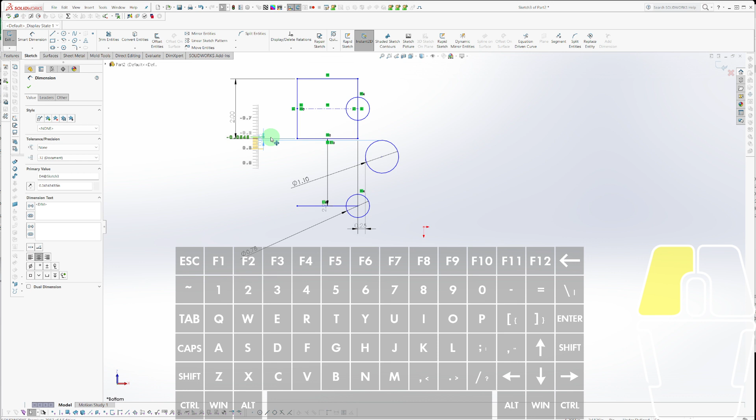And so I'm going to select both of these, and then I'm going to call them equal. So then I dimension this once, and I call it 0.78. And so now I know I need to be above this and below this with the actual bar. And the higher I put it, the more structurally stable I can make it. I did this minimum number, and that's fine. I'm just going to call that good enough.

Now keep in mind there's also a line here, and for that matter here, which is sort of irrelevant, so I'm going to leave it out. I'm going to fix this just because there's probably people having an aneurysm because I don't have fully defined dimensions. I think that can be important, and especially if you're trying to be a dictator in your engineering department, it's nice to have rules because then you can feel powerful.

But I've seen plenty of competent design engineers. Because I remember I was taught that, and then I went to a place and worked with a guy who was a much better designer than me, and he had this curve in space and it was all blue, and I was like, well, but it's not fully defined. He's like, sure it is. It's in that sketch. That's what it is.

The perils of creating tutorial videos. Evidently, I had at some point made hotkeys to start and stop recording in OBS, and so I just did a bunch of work that I didn't record, and so I just deleted it all again, and I got rid of those shortcut keys, and so here we go. So forgive me if you've already seen some of this. I'll probably edit that out.

So this started like this. Whoa. I didn't even have the extrude feature yet. Back in here. And this was not yet construction. Alright, so here's the cross-member tube. And this represents the barbell bar. And this represents the vertical leg of the power rack.

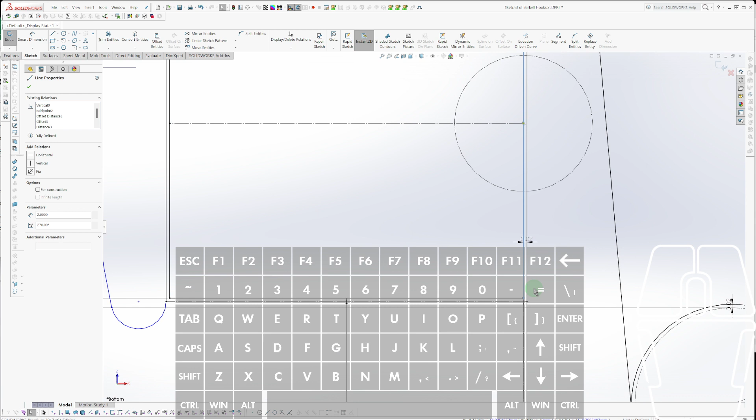And let's move this upwards. Can I? There we go. Now there's going to be potentially a stress riser here and here, but that's why I'm making this big radius. We'll see how that plays out when I throw some FEA at it. I need to make these construction. Select chain, construction. And I know I already did that. I already undid that and then redid it. That's fine.

There's a radius here. I'm going to put a radius in here, but it's a very small radius on the square tubing. I'll put that in as a next feature, just because it'll be simpler that way. I've heard people, again, self-appointed dictators say, you have to do the fillet not in the sketch. And I call BS on that. It's all situational. So many people are so definitive on things that are, in fact, in my opinion, situational. And I've been doing this a long time.

Let's undo that. So I decided that I want this. So this hook is going to want to flex, right? And so that's why it's sort of exaggerated like this. I want it thicker. The further it goes up the hook, the thicker it needs to be, and the further to the tip of the hook, the thinner it needs to be. So how can I accomplish that? And I already know the answer, but I'm just saying it for your sake.

So I'm going to create a line here to here. Then I'm going to make it coincident with this. And then I'm going to create a line from this midpoint just to an arbitrarily reliable point. Let's say to here, and then coincident again with the center. Did I just accidentally call it a midpoint? No, good.

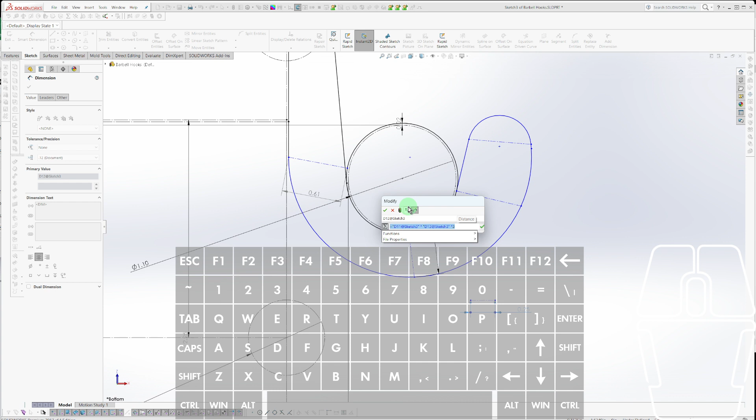And then this is going to be also a formula. And I'm going to paste that, but then I'm going to call this times 0.2. I'm sorry, times 2. Ah, that got ugly quick. Got ugly quick. And you know what I'm going to do? I'm just going to delete that. And I'm going to trim this, and this, and this.

And I want to make this tangent. Problem solved. Let's put this line here. So evidently, I didn't want that straight line in there. It was just going to cause me a little bit of hassle. And I see that I don't have an angle dimension here yet. Kind of thinking I already did, but again, I did that work that I didn't save. I'm sorry, not that I didn't save it. I deleted it.

Why is this? Okay, well this doesn't. That one's not happy. I'm not sure what the deal is. That's fine. So now the reason I did this is, in theory, now if I adjust this scale factor, say 0.23, that will adjust the proportionality of this line to this line to this line, right? So that's interesting there. Anyway, we now have mostly good geometry.

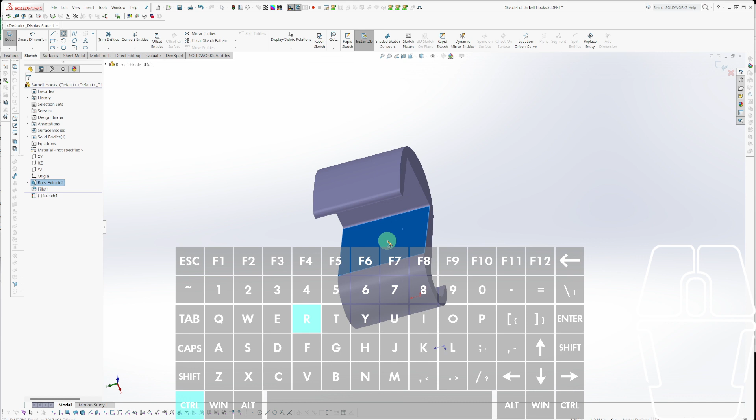Alrighty. And so I made this 3 inches, but the tube is 2 inches, and so I am going to just create a sketch here and create a rectangle, and it's going to be 2 inches from here, and it's going to be in line with this. Am I thinking about that correctly? I'm just going to do it, and then when it's wrong, I'll change it. I also need to go this direction slightly. I can drag this down to almost nothing, just to get rid of that radius also, right?

So now, yeah, so I totally thought about that backwards, and so I'm still going to reuse the sketch. I'm going to delete. No, you know what? I don't even need to delete that. I can do this, and then I am going to rebuild, and I just need to go the other direction. So flip that direction, and then I'm good. Except for

oh, I don't want the second direction. Is that what the deal is? It seems like that's going to miss something. Something about the radius. What happens to the radius if I do that? Yeah, so I took away the radius by doing that. I don't want to take away the radius by doing that. Okay, alright, I'm just going to delete that. Oh, I can't do that.

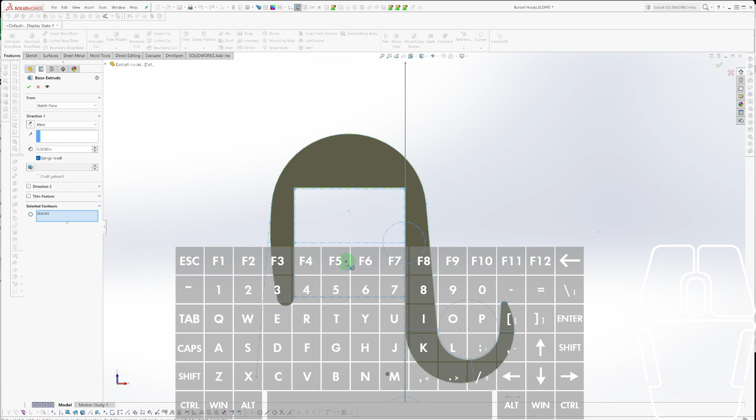So as you can see here, if it's not obvious, I'm just going to show. So let's put a sketch here, and no, I'm just going to reuse this sketch. I think I should be able to select. I need to show the sketch first, though. Show the sketch, N for normal to the selection, and I'm going to reuse the sketch. I'm going to say X for extrude. And I'm going to say select contours. And select these. It doesn't want me to select that contour.

So I guess I'm just going to, in fact, create a new sketch here. And create a new rectangle and use these as a reference. And direction 2, up to here. And don't merge. And then let's say like this. And not in the midpoint. What are the chances of getting that? And like this, and do this, and then call these equal, so it's a square.

And then, so let's say that, and control that, and collinear. And now I have my vertical cross member just for reference. And then I can also do this just to represent the barbell. I'm just going to project this geometry. Don't merge. Direction 2. Done. Okay, so now one more. I'm just going to change some color here to make this easier to see.

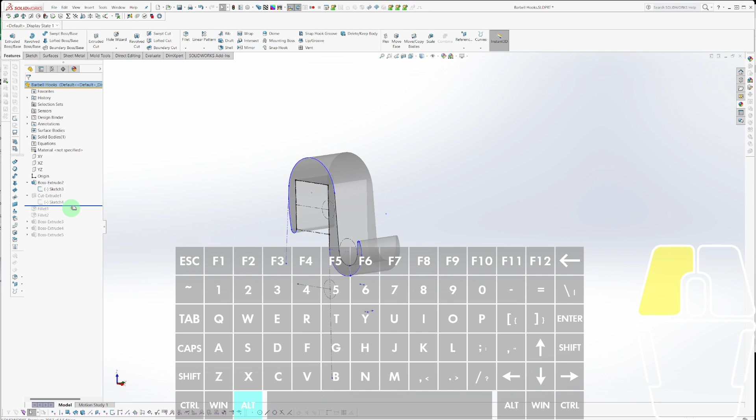Which way is it? I was afraid of something like that. So let's see. Let's back up to here. And okay, I'm just going to do this. I'm going to call it 2. And so the sort of error is in how I defined this sketch, because I defined it right to that edge. Wait a minute, what is going on here?

Yeah, so this is my overlap. So let's call it 1 inch. So now it's halfway. And then I'm going to roll to end. And so this is probably fine. It's probably still overkill. Actually, though, you know what? I really want it to lock past the other side. I'm going to undo a couple times here. Get back to where I was. Now I'm back to where I was.

And I'm going to move face on this. Let's call it 0.05 just for good enough. And then I'm going to create a sketch on there and project that geometry. And just a little bit of an overhang. So it will catch itself on the other side of the... Yeah, that's what I want. So it'll catch itself on the other side. And let's make this tangent.

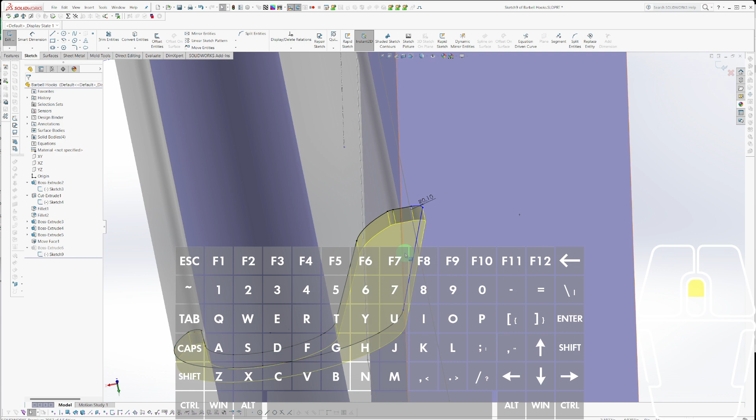Because I want to put a little bit of a taper to make the overhang more reliable. So I'm going to extrude this another, say, 0.125, eighth of an inch. Merge only with this. And I'm going to taper this. I kind of don't like that. I'm going to adjust this to, yeah, okay.

Let's do that. I'm going to get rid of it in a second, but just so I can extend to there, trim that, and let's just make a line tangent to that. And then trim this, interesting. I'm going to trim that. Trim both of those. And I'm going to do a tangent arc. Like so. Well, first I'll trim this. Did I miss the T? T for trim. And then I'll select these, make them tangent. Hope I'm still recording. Looks like I am.

And so I don't need this to overlap a whole lot. I just want it to overlap a little bit to act as a catch so the hook doesn't slide inboard. Does that make sense? And R for rebuild gets me out of there. But I want to taper that. I got rid of my top flat surface there. So I'll just go to, say, here. And then I'm going to go normal. And it's a bigger gap visually, but whatever it looks like, it's only 50 thousandths of an inch.

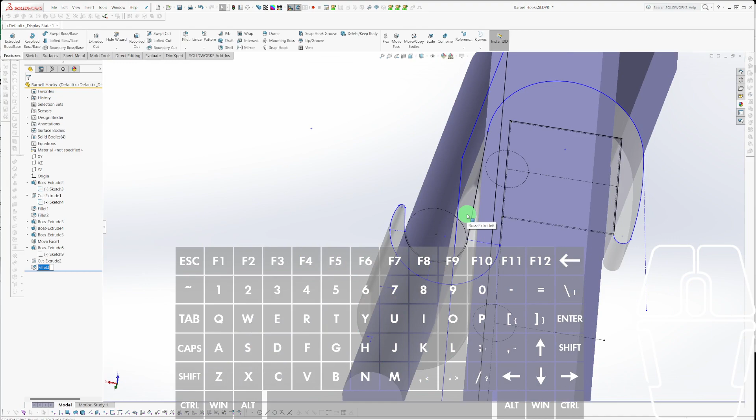Extrude cut. And now I have a sharp edge here, so let's throw a little radius on this edge. Why can I not select that edge? Okay, now I can. Not sure why. Fillet. And before I do that, let's extrude cut in both directions. There we go. Now fillet. Oh, actually, sure. That's fine. I was going to do that anyway. So this being transparent, it's tricky to see. So now you can see what's going on here.

I want to put another radius. I'm going to right click and isolate this. And I'm going to remove this. Actually, you know what? I'm going to do another display state so I can go back to transparent if I want. And in this state, if I delete that and then I go back to here. Okay, yeah, that's what I want to do. What? Somehow it got me out of isolate. Getting rid of that. I do want to isolate this again.

You know what I could do instead of isolate is just do a delete/keep bodies, keep this, enter, and then I can just suppress that, unsuppress it as I wish. Hide my sketches, which is the numpad asterisk on my shortcuts. And is this going to do anything? This nub? I think I want that extrude to go a little taller so that the nub protrudes more.

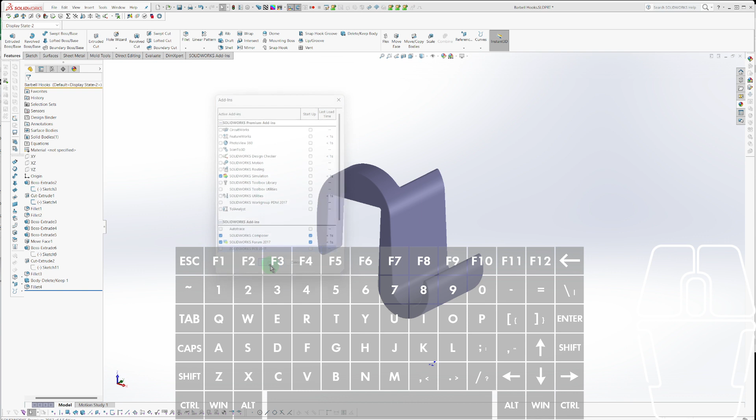So I am going to add in my simulation. So now I can do structural analysis on this. But being plastic, it's not really going to be reliable. But that doesn't matter. I am going to ask Google off screen here the properties of. Why can't I? Okay, fine, be like that. I'll just move to the other screen. Let's ask Google the. I guess I'll just go to MatWeb. MatWeb.com. Polycarbonate.

And it's obviously going to be at least somewhat degraded, being that it's 3D printed. Although, I don't know why I didn't like that. I'll just actually go to matweb.com. And I'll bring this over here for you guys. Whoa. Totally uncool.

Okay, I am recording again. All right, so here we have matweb.com on screen. Great resource. And let's say polycarbonate, just to get a rough idea of the mechanical properties. Overview of polycarbonate ABS. No. Polycarbonate. I mean, let's just say extruded, just to look at something, and I'm going to degrade it so many different ways because it's not going to be accurate, but at least it'll show me where my stress risers are. That's really all I want.

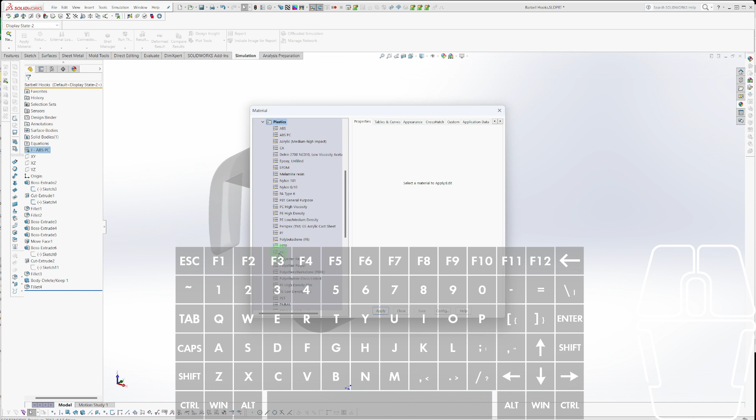Let's see. Plastics. ABS PC. See all these letter combinations. I don't see just a PC. But anyway, the MatWeb info is not ABS PC here that I selected. It's just PC. And I've derated from there significantly. And so we'll call this good enough.

All right, so let's go to simulation, study. I don't need to name it. We'll just call it static 1. And my material, because I pre-selected my material, it's already established. Okay, I'm going to go back into my model.

So first I need to define my fixtures, meaning what's holding this in position. And then I need to define my external loads, which is sort of pushed down on here. And then I need to build a mesh and then run the simulation. So first things first, for my fixtures, I basically want to add a sliding fixture here, but it's not across this whole thing because it's only from here to the left. So I'm going to do a split face on that.

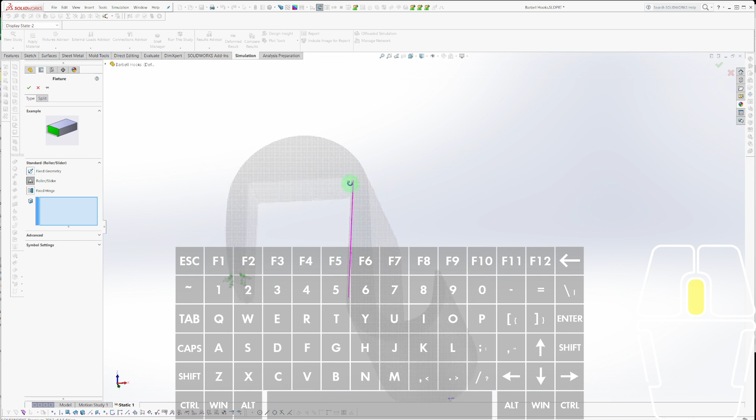I'm going to call that fixed, and then I'm going to add another fixture for roller slider, and that is going to be this guy. Right? And then I'm going to do another roller slider for this guy. Remember I did that split face for this. And it's really going to try to slide off. And so I'm going to make another roller slider just for that point right there. I'm not sure how that's going to work out. Again, this is not for something professional. It's just, in my experience, how I can get good enough results to get a rough order of magnitude prediction of where the stress risers will be.

Can I do it to just a point? I can't do a slider to just a point. So, all right, let's call it this line then. I can't do it for just a line? Man. I guess I need to do another split face. Go back into the model. Sketch here. Line here. Call it horizontal. Oops, in this view that is vertical, even though it's not really.

I'm going to do a dimension from here to here. Why did that not take? Dimension to here. Okay, that was weird. Say 30 thousandths just for something. And then a split face, split line, this face. What? I don't know why all that's highlighted, but anyway, I only selected the one face. Oh, what?

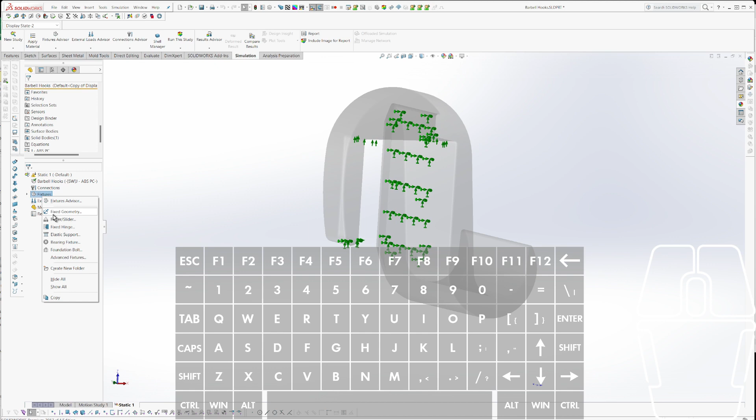Back into my analysis simulation and add another sliding fixture. No, that's fixed. Roller slider. And like I said, there may be a better way to do this. I'm not a total FEA guru. I just know enough to get what I want done, and I'm on the wrong face. Just enough to get close enough.

And you might say, oh, that's not the right way to do it. I'll tell you one thing. I've designed spacecraft structural components using methods like this, and then independently verified from an independent lab who did fatigue and modal analysis on entire assemblies and all the parts. And my assumptions work for the most part.

So feel free to roast me. I've had my methods verified by legit aerospace independent structural lab analysis to evaluate and honed these techniques to successfully pass very consistently. So there. Nah. Okay. I'm mature, I know.

Alright, so I'm going to save my work because it usually crashes right before you save your work. I was going to put some kind of taper on this, but that was before I was going to back it up by this vertical tube leg. So this thing is going to be so overkill anyway. But it'll be interesting to see how it flexes. Alright, so now I need to put a load on it.

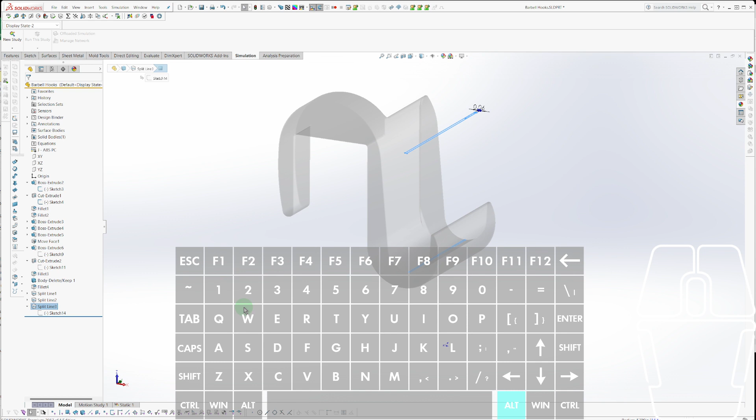Alright, this is a little off center, so let's adjust this sketch. I'm going to go normal to it, and create a line from the midpoint of this to the midpoint of this, and then make it vertical. And then I'm going to put a dimension here, just to call this 0.06, just to give it a number. So now it's much more representative. As long as this doesn't deflect, this is fairly representative of what's going to happen there. I'm going to apply my load to that sort of fat line. Again, in my experience, sufficiently.

I heard an interesting quote, and there's always a know-it-all that will tell you that you're wrong. And I know I'm wrong a lot. But a great quote, I quoted it somewhere else, and somebody who's a legit smart person berated me one time for saying that doesn't make sense. All models are wrong. Some models are useful, and that might be a paraphrase. I don't remember who said it. Forgive me, Mr. Genius Guy. He might have been like a sociologist or something. I could Google it.

So all models are wrong, but some are useful. Works for me, and has worked for me professionally, in as much as spacecraft component structural design. Thank you very much.

So the mesh will take care of itself, and I'm just going to right click and say run and see what happens. No, I didn't put a load on it yet. Yeah, exactly, no loads. All right, external loads, add a force to this fat line, and I am going to go with English. I should give it a direction, but that's close enough. So I'm going to call it good.

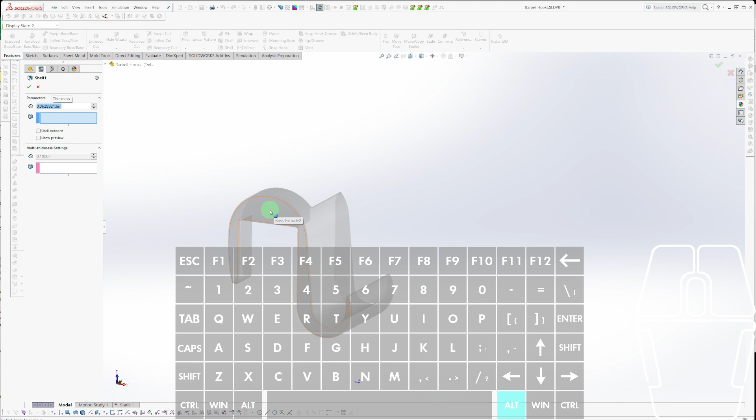Now I guess my top and bottom layers are going to be artificially... I probably don't want that thick of top and bottom layers, but maybe actually I do. I do, because the top and bottom layers are really the ones that are taking all the load. So I do want a lot of top and bottom layers. So I'll have to tune my top and bottom layers to match whatever thickness I come up with. And so let's do that.

Thickness value greater, yeah, okay, whatever. I didn't like that. What can I do to make it like that? I guess I need to make this radius bigger. Where is that radius? Why are these things not highlighting when I'm selecting them? There it goes. Okay, that was weird. Oops, that was the one. And okay, so I don't want to go too big on that radius, but this one I can go larger just fine.

And you know what? Let's roll to the end. Save my work because I'm about to break it, in case the software crashes. And so that was this one. No, it was this one. This fillet. And I'm going to instant 3D it. Wrong direction. There we go. And that fixed my shell issue. Great. I'm surprised this one's not a problem, but I guess it's not. And so I'm going to save my work again, go back into here, and rerun the simulation with this piece being hollow.

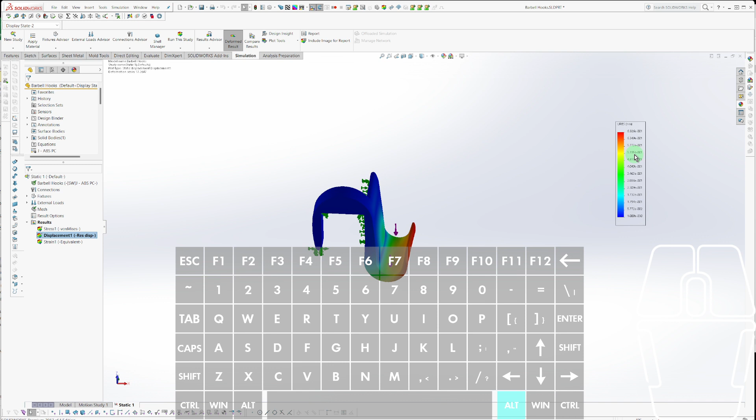So what's my actual displacement? The worst displacement, and now this is in metric, but fair enough, is 6 to the minus 1, so 6.9, so 0.7 millimeters. So that's like 30 thousandths of an inch deflection predicted at, oh, and that's interesting, that's out here. I was sort of expecting it to be like around here. Just a little more than I was hoping for, but I think it's probably fine. I have to remember to do the proper amount of shells to come up with that 1.6 millimeters.

And interestingly, okay, so I knew it was going to deflect from this direction. Can I hit N for normal here? Yes. So I knew that this was going to twist a little bit. I totally expected that, and I kind of thought that here would be maybe not the maximum deflection, but where most of the stress is. Is that the case? I mean, I say that. That's not even really what I meant. But I am saying that this thing is not going to break as it is. So the nice thing about this optimization process... Now let me think about how I've constrained it, though, before I...

As Harvey Keitel says in Pulp Fiction, and I won't quote him, but let's not count our chickens before they hatch, gentlemen. How's that?

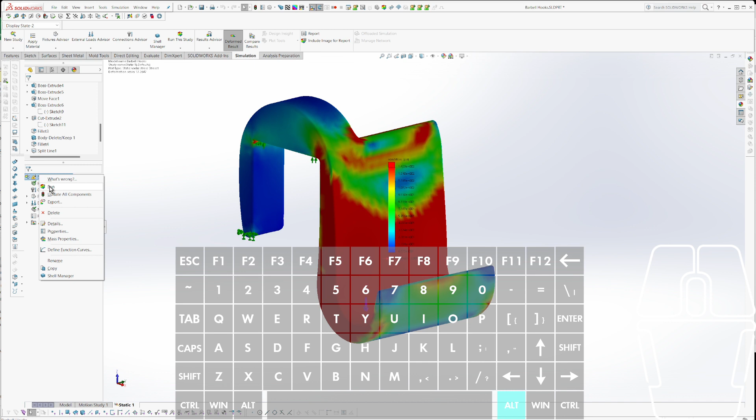Alright, let's try running it again. So now I have stress risers around this. But I'm going to say that also corroborates that it's probably okay. And I'm not going to try to justify that. Just going to tell myself that, and say, okay, it's my barbell, it's going to land on my head. I'm putting myself at risk. Good enough. I don't need to go to the independent aerospace structural research company to verify that my barbell is not going to land on my head.

So, now, I'm still the same. Okay, somehow my max stress came down. Isn't that special? I made it sliding, and I made it more realistic, and my max stress actually came down. I'm tempted to look back and see where these stresses decreased. But it's irrelevant. How about my deflections? My displacement has increased up to 1.5 millimeters. And it's much more twisting. Remember I was saying how I expected it to be twisting.

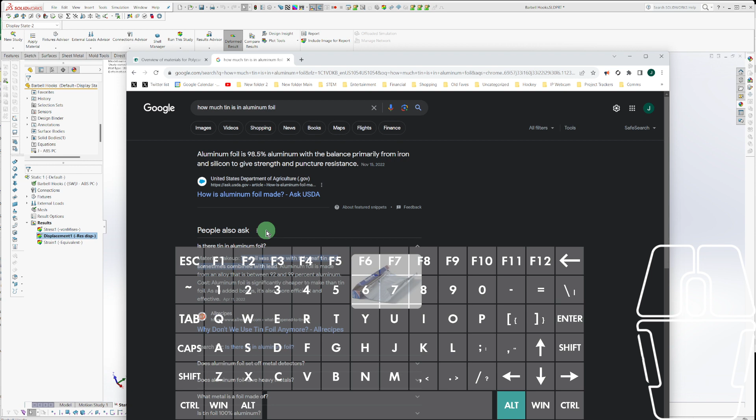They're not telling me. Alright, I just need to go back to MatWeb here and say aluminum foil, and I should be able to get the chemical composition. Aluminum foil coating, aluminum foil tape. It doesn't say adhesive backed, and it doesn't give me the chemical composition. I'm leaning towards there's actually no tin in aluminum foil. That's my assumption, and I'm sticking to it.

Okay, meanwhile, back at the ranch, my deflection has gone up. My stresses have gone down. Let's go back to the stresses again and continue to revisit my fixtures. I'm going to change this because the way it's really going to work is it's going to be all on this forward edge. Just as it's all on this top edge on that face, it's going to be all on this forward edge. So I'm going to go back into my model,

and I'm going to select this face and create a rectangle on it. I don't need a whole rectangle, I'll just create a line. It thinks it's vertical, I can tell by this UCS icon here, and I'm going to say, again, 0.06. Enter, and then split line on that face. Why does it do that? Please select one or more faces to create edges. What? I don't know what's going on there. It's consistent though. But anyway, I got it to work.

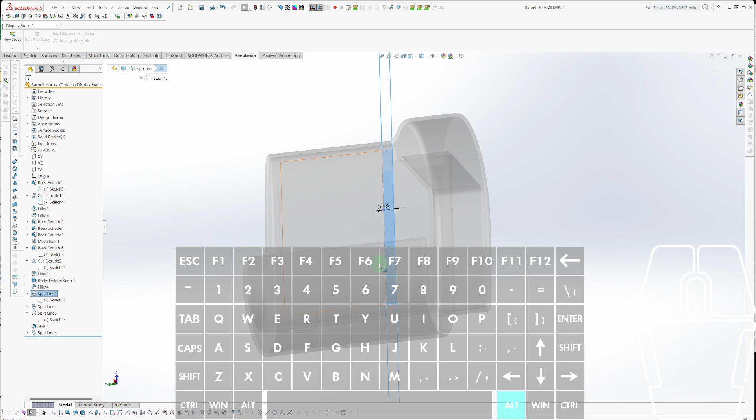Where's the split line? Is that this one? Yeah. I'm going to add another line. Let's just offset this by 0.1 in this direction. And that's just arbitrary anyway. So now I have that, and I should have broken this one also. No, it didn't figure this one was broken, so I need to edit this guy. Instead of this one, I want it to be this one.

Alright, so I think this is typically how all models are wrong, but some models are useful. You iterate, you make an almost useless model that will fool you into killing people, and then you gradually refine it until you scrutinize it enough that you're confident that it's good, perfect enough, as I like to say, and probably annoys people, and that's fine. If I'm honest, that's kind of how I roll.

All right. So, how are we doing now? Our max stress is still... Oh, you know what? I bet that max stress is down here, and that's why it keeps giving me that max stress. But these are also in the red. That's so weird. I'm going to adjust that scale because I'm not sure why these are all so uniform in stress. So I am going to edit this definition and manually define what's shown here. Minimum value, 142.

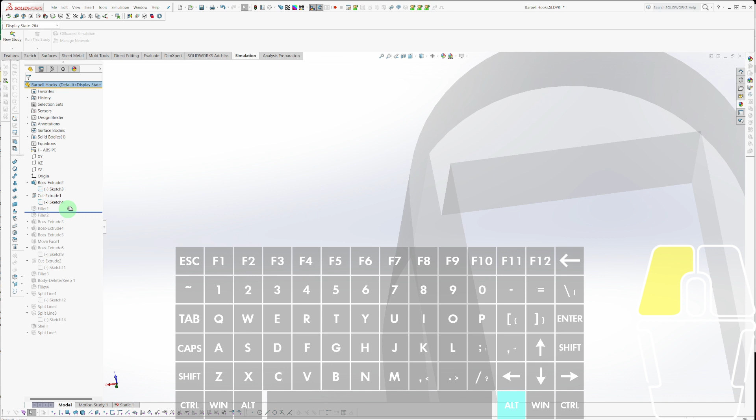So, where are my max stresses? Surprisingly not here. I don't have a radius. Yeah, I do have a radius there. Yeah, there's a radius there. I want this radius to be bigger though. I go back. Oh. Yeah. Let's do that. And then this one. Yeah. And then I'm going to make this a big fat radius. Now that's useful. That's what I'm talking about.

Nice chunky radius there. Well, I say that, but as I think about it, the barbell is going to remain horizontal. And therefore, it's not going to put a big stress on there. And that's why there wasn't a big stress on there. So I'm going to change this back to, let's say, 0.1. And if I get a stress riser there, then I'll increase it again.

But I lost the rest of my radii here. How'd that happen? This guy and this guy, and give them a 0.06. I wonder if that would mess up my shell. Messed up other things. Oh, it messed that. Yeah. Oh, so I put that in later. There we go. But what did I break? I broke this split line. Oh, I just lost my reference, that's all.

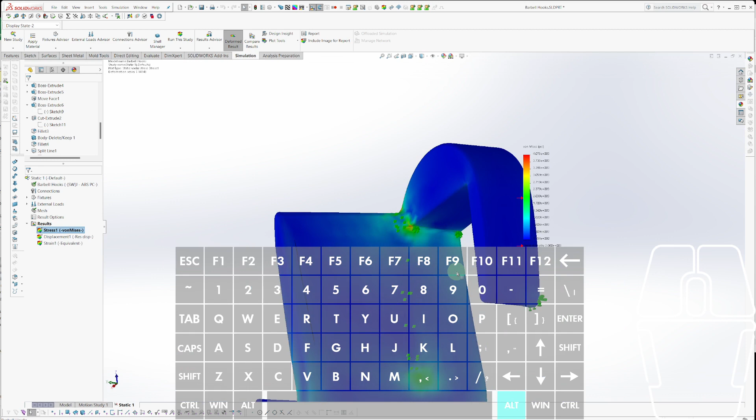Okay, so I do have a little bit of a stress riser here. I am way over the max stress. Where? Here? No. Where's my max stress? There. Not a huge surprise. And that is not big overkill in design. And so that's why I'm doing this. So that is fairly likely to fail there. Now, on the other hand, again, the barbell is pushing downward evenly across this.

A lot of times you get these very concentrated max stresses, and it's more of an artifact of how you make the sliding fixture, and it's not real. But what tells me that it is kind of real is that this yellow is also over, and a lot of this green is also over my 2-to-1 safety factored yield strength. And also, interesting here, this is also approaching my safety factor limit. These are also.

So I can make it thicker walls, or I could increase this thickness here, but that's not really my problem here. Although that's a little bit. And this doesn't need to be nearly this tall, and this doesn't need to be nearly this tall.

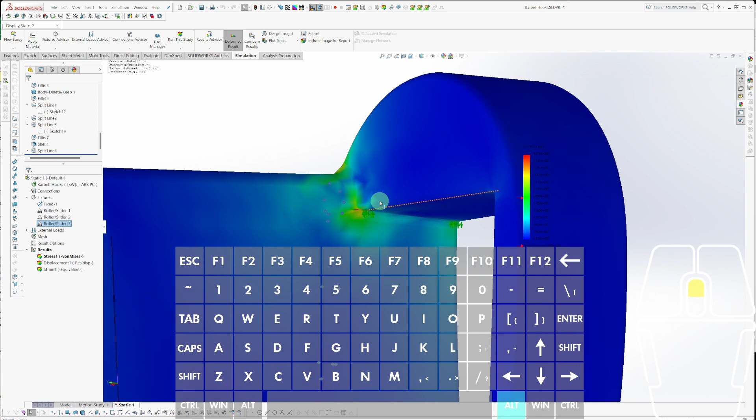Even though the bar is helping it to stay straight, really the bar is constraining it in two degrees of freedom. The bar only really leaves it the 1 degree of freedom for the tip to uncurl downward. But I'm going to call it somewhat overkill. Like I say, I want to design this for overkill. But I can eliminate a lot of this plastic. So let's save this. First, I'm going to eliminate the dark blue areas.

And did I lose my display states again? I did. I don't know why it's giving me persistent... this transparent keeps coming back. When did I make the whole part that? I don't remember doing that. Okay.

So this here was way too blue. This here was way too blue. So I can adjust this significantly. What I'm going to do here, that's not what I meant to do. R for rebuild is not what I meant to do. I meant to do T for trim. I'm just going to trim this back to like here. And I don't want this to any longer be tangent to that. I'm going to save my work. S for save.

And this angle. So this should get significantly stronger. And it turns out I need something more like this. And make this tangent to this. And that's already, whoa. Let's just give this an angular dimension of, say, I don't know, 10 degrees.

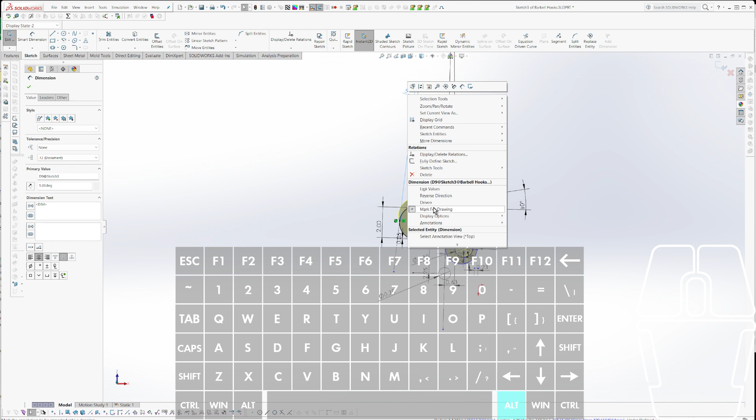And what is driving this? Is it this angular dimension? Let's make this driven. How many times did I say that backwards? Okay, that's still not constraining it. Sometimes a curve will keep a constraint; you delete a constraint and it still acts as if you didn't delete it. So I'm going to delete that. Yes. I'm going to bring this up here.

And I think I can get away with just making this a line. It probably doesn't even have to go that far. It'll probably just go down halfway, or even just down to here. But I don't want it to accidentally jump off, so I'm just going to do overkill as usual. No, I meant to drag that. And then I'll make these tangent. And, whoa, those aren't tangent. Tangent.

I don't think that needs to be much. I'm just going to put a little bit of an angle on this, an angular dimension. Let's say 3 degrees. That's even overkill. Reduce that. All right, that looks good.

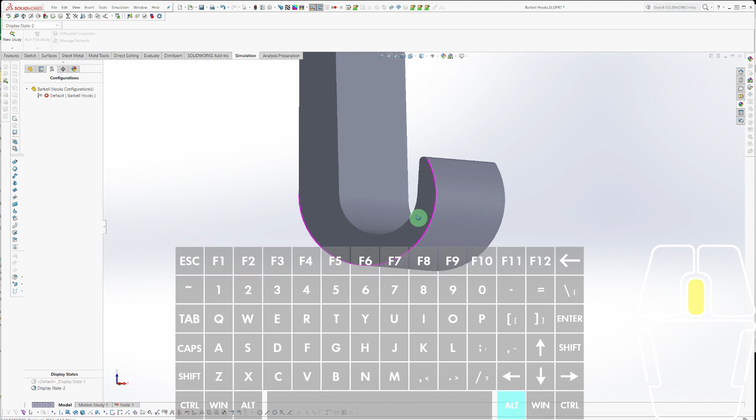All right. Now what's going on down here? Things are not fully defined, and I don't care. Let's see what happens. I broke stuff. Oh, I broke a lot. Now, I didn't save myself a backup, so I don't remember exactly what went where.

Okay, that was just recreating the... What, I deleted the vertex or something? Yeah, up to vertex. Can't find the vertex, so I'll just redefine the vertex then. So that fixes that. And this again probably lost its vertex.

Oh, open contour. What? Oh, this is that curve. So I'm going to make a tangent curve here. Make that tangent. I'm going to call this very small radius 0.02. And then this guy can do this. And so I'm going to dimension that to that and call it, I don't know, 0.31, 5/16. Rebuild. Okay.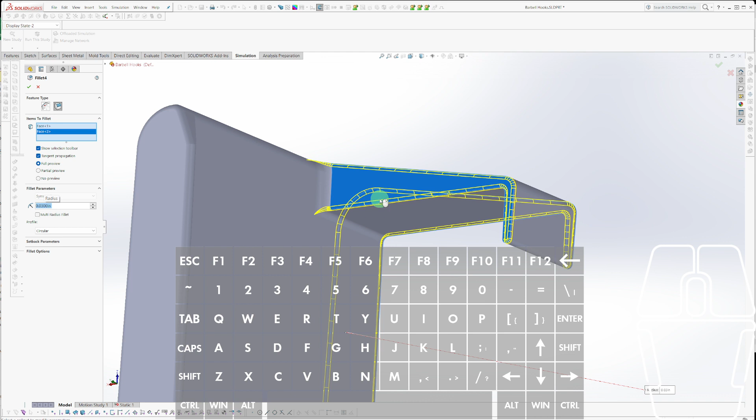And that looks so flimsy now that I look at it like this. How could that possibly be effective? Because that's just not where the stresses are. It's an interesting thing about stress analysis. Structural analysis, stress analysis, sure, I'm going to call it that. Fillet. Okay, whatever, I'll take that. Did it mess up my shell though? That's still shelled? Holy cow. Okay. Now if that twists out, that ain't going anywhere. Alright, let's run this analysis again.

This video ended up being way longer than I intended it to be, as usual.

Broke my fixtures. Aha, I broke the fixture. The true fixture. Add a definition. And this should again be fine. I expect to have some artificial artifacts. Is there such a thing as artificial artifact, or is that a redundant redundancy?

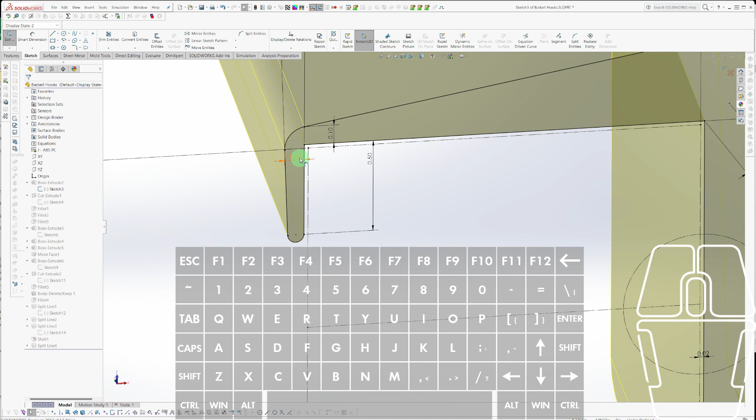That is the sketch. I am going to... maybe that'll take care of it. Or not. Let's try it. Let's see. No, invalid body still. Okay. What? That's not what I meant to do.

Alright. I'm going to do a little thing called divide and conquer here. Advanced technique. I'm going to chop this thing right off and see if that fixes it. And then I'm going to go shell. And I say okay. So that's not necessarily where the problem was. Now if I make this visible and turn my sketches on so it's really visible, and then do this, and then do this. Still. So evidently in two places I have too much. It's too minimum thickness. Let's press that.

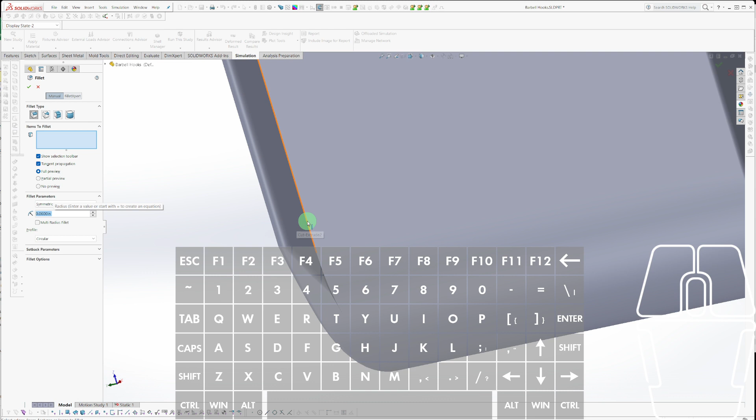Interesting that those aren't filleted. Probably not the problem, but I want them to be filleted. I think 0.03 is just too small. Could be part of my problem. Although adding these radii may actually be the problem. It could be. I don't think so. Why doesn't it want me to do that? Oh, because of the...

Okay, it does not want to fillet that. How about if I go to before this? Still maybe not. Now it's happy. Yeah, I'm going to leave that at 0.06. And then, does that break these? No. Good. And still doesn't like it, but what? Okay.

Okay, which one was it? I don't know. Why can't I see that thing? That's that guy. I'd really like this better if I could see. Okay. I have mixed feelings about this new snipper tool. Open, damn it. Oh. Why is that fighting me? Stop fighting me. That took like 47 clicks. What was that about? Okay then. Alright. That's approximately where it's oriented. So that way when I go back into here, I can make sense of it.

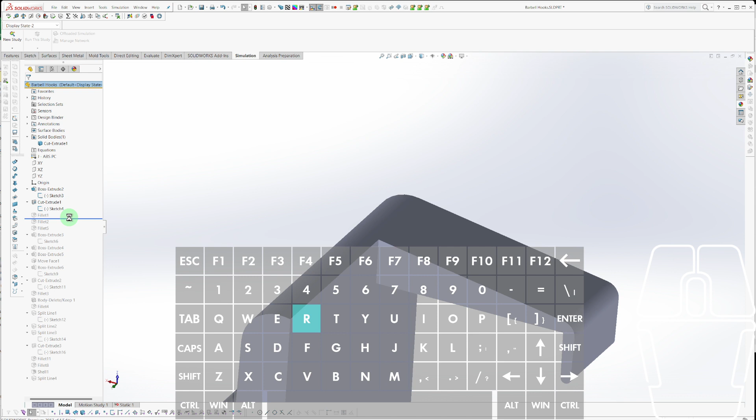Fixtures. That's that guy. That's that guy. That's confusing. Did I break my split line? No. Definition. And I'm doing this blind. Oh, I can't even. That's annoying. Alright then. Oh, that's ugly. Alright, let's regroup. That guy's right. I think. That guy should be fine. That guy should likely be fine. That should be fine.

This, 0.13. I mean, that could fix it. What? Oh, because of that huge radius there. Split the difference. So that fixed some things. If I just go back in here, can I see it? No. Well, isn't this a rabbit hole? Can I select on here yet? Anywhere? Anywhere? Bueller? No. Something's not happy.

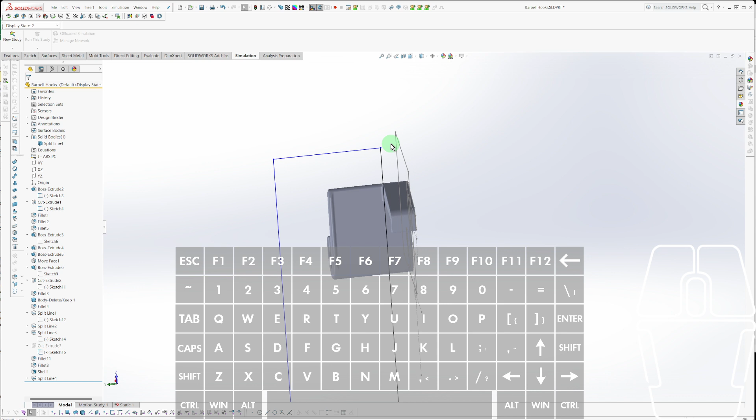I feel like I'm gonna sneeze. You know what? I don't know if this is just like a psychological placebo effect thing, but I remember way back when somebody telling me if you're gonna sneeze and you can't sneeze, and you're like, I want to sneeze, but it doesn't come out, they say, look up at the light. And I look up at the light, and then I sneeze. I don't know if it's the looking up or if it's the looking at a light. I think it's probably more like looking up, but maybe it's just more placebo. But maybe it's actually looking up.

I don't know. Now, this guy isn't helping me that this is 0.03. Can I do like 0.1? Nice. Although, I kind of don't want 0.1 there. Let's go 0.06, if it'll let me. Well, let's first see, does that fix my problem? Still doesn't fix the problem. So let's call this, no. Where are you? Where'd the dimension go? There it is. 0.07. And rebuild, and it's still invisible.

Well, I mean, how much time do I want to waste on trying to save a little bit of material? Let's just do this. See if it fixes it. Okay, did that fix it then? I still can't see it. If all the time that was the problem, well, for some reason it hid that, that would be goofy. Regardless, it's only a little bit of extra material, so I don't care.

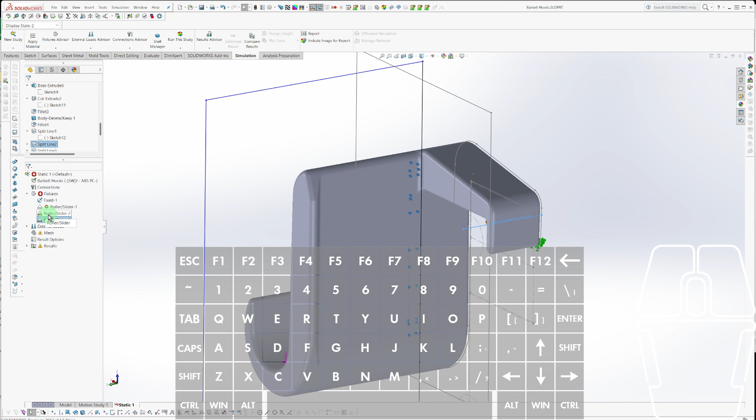And I am going to reduce it. That's not the right button. Model. Oh, no, that was right. Fix that. Fixture. Holy cow, that was a rabbit hole. I got past it though. Now back to the actual work. And we're still significantly over. No, I mean, I did also thin the walls out a little bit, so.

But let's see, so basically greening up are my problem areas. So this makes more sense though. So this and this is where I would expect to see the most stress. And here and here and here are also where I would expect to see the most stress, and here. And back here, we're really in good shape. This is just starting to get a little stressed, but again, that's because that is my true fixed fixture. The other ones are roller sliders. All right, so we are getting there. But I do need to make it stronger.

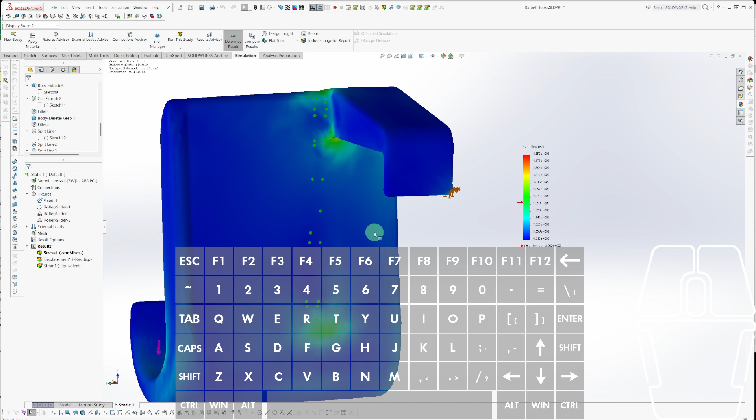But if I put a rib in here, I don't like that because it's in plane with the layers, and that is not ideal. So actually, here and here and here, that's my real concern because those are in plane with the layers. Each layer is like the capital J, and so this is just going to put in tension one of the layer lines, and that is stronger in theory. Although with polycarbonate, it has such good interlayer adhesion that it may not be a problem. But I am going to treat it as if it is.

Therefore, maybe I do just want it thicker. More shell walls. What happens with my shell minimum curvature thing if I do that? Let's see what happens. If I make my shell 0.12 rather than 0.06, the shell does not like that. Not a major surprise. And it won't even do it anyway.

Alright, what I'm going to do is get rid of these radii. Or maybe not all of them, but at least this one. And this one. And rerun it. Alright. Let's do that just for now. Let me do what I was originally going to do, which is add a... Haha, this is going to be even goofier and better, and safer, I should say.

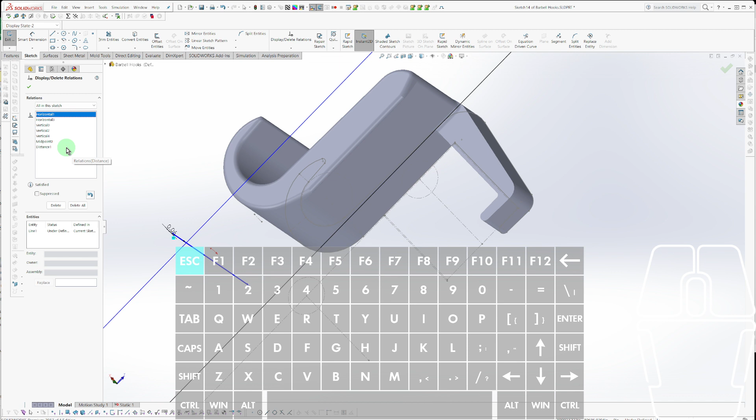Add a sketch plane. And oh, looks nice. Looks like I can unsuppress it now. Did that bring my radius back as I didn't want it to? It did, unfortunately. Wait, what? Yeah. So I need to get rid of the offending constraint. It's probably a midpoint. Could be a distance. It's not going to be the rest of them. So I should be able to now suppress that while still having this split. Nice, nice. All right.

External load, redefine. All right, now let's see what happens. Am I shelled? Yes. But did I double my shell? No. 0.12. Does that work? Please? Nice. Alright, 0.12 shell. Oh, interesting. I didn't get rid of that radius and it still worked. Good stuff. Okay. Let's run this.

I'm getting mentally fatigued and hungry. Some black coffee will take care of everything.

Alright. Where are my stress risers now? It's funny to see how much this stuff deflected, and I'm fine with that. I do that intentionally, so that way I know that this fixed fixture is not interfering with the motion of the part. A little trick I've been using for a long time. And so I just have that one tiny stress riser right there.

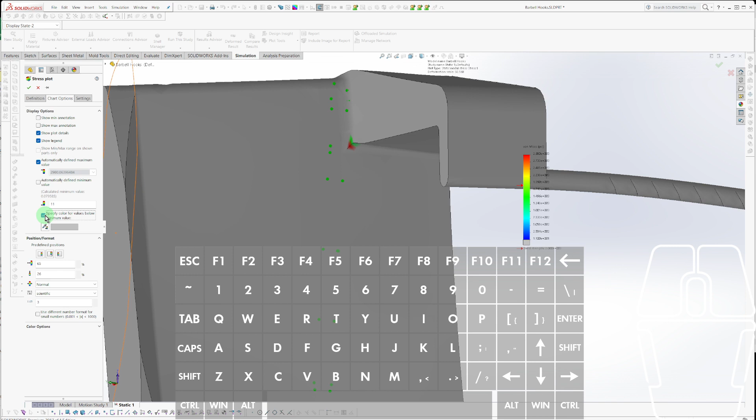So this thing is so overkill, except right here. I kind of knew that when I doubled everything, it would more than double the stiffness. But I still have to mitigate that stress right there. Actually, let's change this to 1000. Wow. Okay. So let's make anything under 1000 grayed out, and that'll be my real happy place. Alright, so much of this is just way overkill, except for right there, and right there.

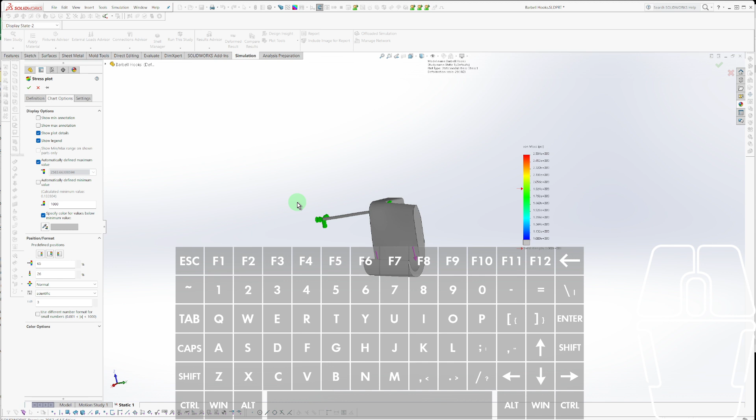I've been doing this stuff so long, I see these colors, the way they're going to distribute very roughly in my head. And then obviously there are some surprises because I'm not a total computer, but I can kind of see in my head where I can taper things down, because the stress is just going to reduce as the leverage is. That's not a good way to say it, but anyway, I can see ahead of time where I know I can taper things down.

So right from the start, before I even laid any of this out, I intended to potentially do some tapering, and I'll try to demonstrate here. Automatically define maximum. No. Anything under 1,000. And then the minimum value, 0. I might want it higher than that, but let's call it 111 for now, just to do something. And specify color for this, anything over it is black.

Okay, so you see the black there. You see not black there. As I mentioned, this is not quite up to the highest stress point. And you can see, interesting. So I can taper up top more than I can at the bottom, theoretically. Although this is such overkill down here that I can thin this out significantly down here. So let's do that and rerun it.

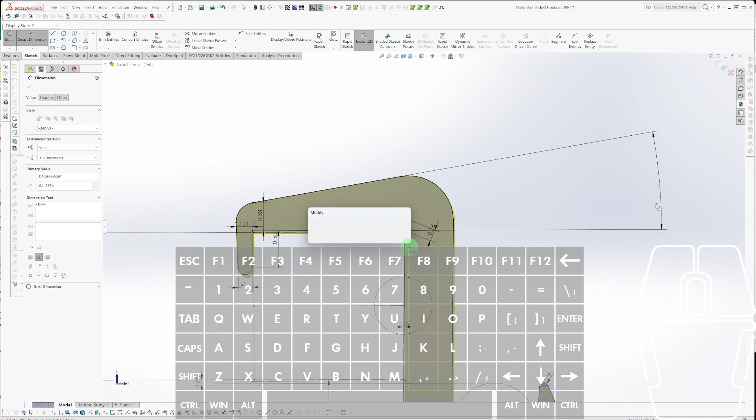Interesting. Let's get rid of this angle. And call that that. That's perfect enough. And so now, can I adjust this now? Nice. Nice. Except, you know what's not nice, is I can't get the bar in here now. See what I did there?

So if I make another circle, same size as this, I can't get it out. Alright, so let's make this construction and just leave it here as an indicator. And did I set this at an angle? Interesting. Well, isn't that special? Oh, because I eliminated that line at some point. But that's fine. It's not going to jump up more than its radius.

I could go even lower than that. Even that is going to be plenty in there. Might not be plenty strong. But alright, so now I can get this in and out. And let's see how this looks in the old FEA ski. S for save, run it. There is no load.

Fixture or contact in the following bodies. What are you talking about, Willis? It's funny how I said that entirely incorrectly.

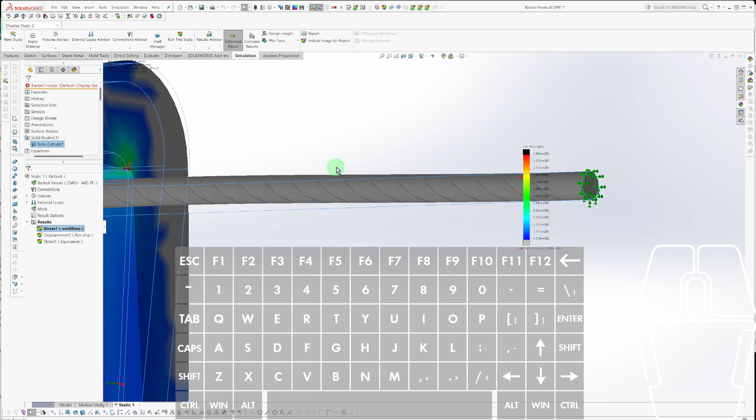So we are, I mean, we're still only at 2600 PSI, you know, 2.6 KSI at the, and that's not even real. There'll be a radius on there, like this radius here, so I'll be back down around 2200, which again has so much safety factor already built in. Look at, it's funny, these deformation lines there. In any case, here I am in the green, so I'm well under my desired safety factor there.

How much does it deflect? 1 millimeter. Okay. A little more than I'd like, but realistically, it's probably fine. I could potentially beef that up. But anyway, I lost the focus of where I was going with this. I was thinking that I could taper some of this down, like from left to right in this view. I could taper it down.

But here and here are really my key stress points. And they're uniform. So I don't necessarily want that part to be tapered. And up here to here seems to be similar, in fact. I think I could taper that down though, but like who cares? But let's try a little something. Let's go back to before the shell. Let's do this. Okay. And actually, that's overkill. Let's just do something.

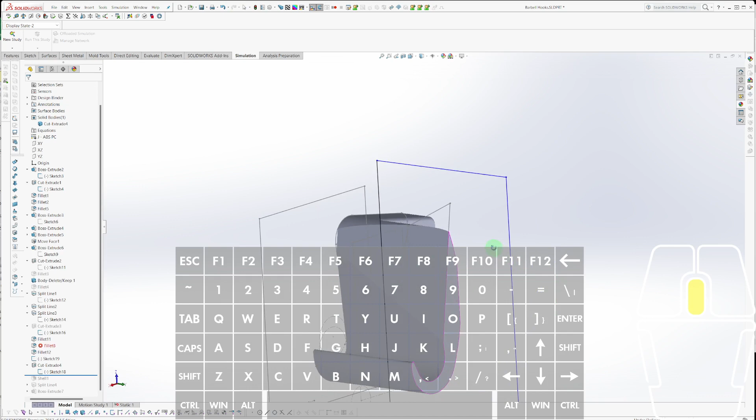And let's, I don't like that it does that. Why, oh, huh, interesting that it didn't consume that sketch or hide it. Let's do this though. Did I not? Oh, yeah, of course it did. See what I'm doing here? Oops. So, that's interesting. That's interesting. Yeah, I'll show you. I'll show you.

Now let's see what happens. Now it's just getting ugly. Now I don't even want to do that just because how ugly it is. But that's okay. I can pretty it up after. We could put lipstick on this pig.

So, as you can see, my stress risers here are still uniform. My stress risers here are still uniform. My stresses across here still plenty strong. That didn't make any sense what I just said, but it kind of did. If you can translate from my internal mental language to reality, we're really in the same place that we were. See what I'm saying there? So let's take that a little further.

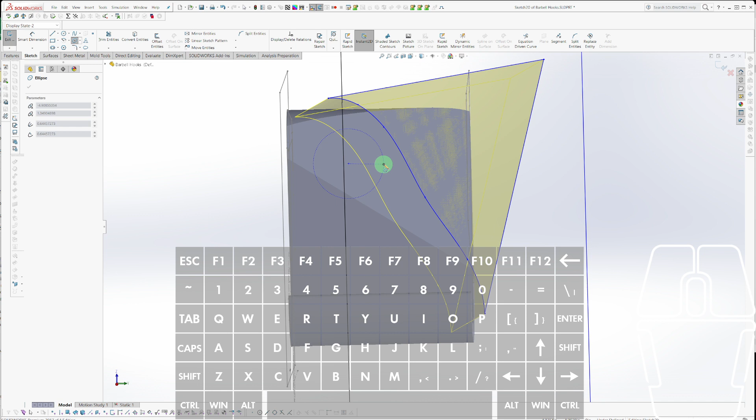To not stretch it around. Then I should be fine. Although I did save my work, so even if it blows up, not the end of the world. And I'm also going to do an ellipse, or a few ellipses. Why do you do that to me? I mean, I'm really looking for trouble now.

Alrighty. It didn't want to cooperate with me too well there, so I fixed that in place. And let's, this guy. Huh, okay. Uh-oh. Oh. Alright, I don't want it to go that far. Oh. This guy. I don't want this guy. Oh, actually, though, I can get away with something like that if I go further up.

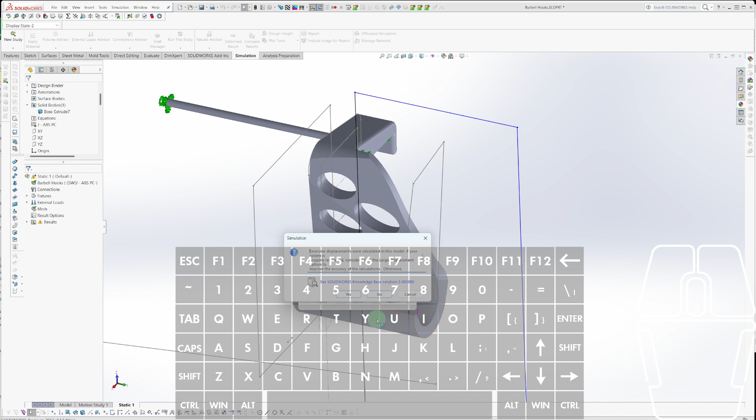Ooh, excessive displacements. I made it pretty weak. Wait a minute. No. Yeah, that got ugly there. So did it shell though? Yeah. Oh, okay. So it didn't shell. Excuse me. Up there. Interesting.

So let's adjust these shapes a little bit. Let's just scale this guy down. Down 33%. And let's run it again. Oh, interesting that I did away with most of this tab, but it's still there, so it should still be effective.

And why is the split line not happy? Oh, okay. Let's get this down a little bit so that split line isn't interfered with. I mean, I could have just fixed that a little bit. I got room for another ellipse up there. Yeah, I don't want to interfere with that.

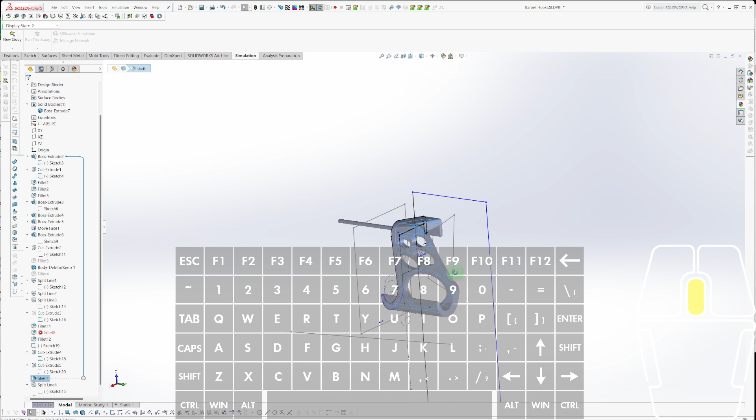So, but is that shelled up there now? Yep, good. Because the only reason I have it shelled is so it's an accurate structural analysis. If that were solid, then those stress risers would be artificially stronger than in reality. Alright, let's see.

And so again, my max stress is 2,500. Oh, has it moved out of town? Where is it now? Well, anyway, down there we have plenty of strength here. Plenty of strength here. Interesting. We're a little bit on the stress risery side on the ends of this ellipse here. That's interesting.

I could be looking for trouble with this ellipse, just because this is going to be in tension, and I'm printing it. Okay, right here won't be, but right here, well, the layers will be in shear. The layers won't be in tension in the direction of the layers, but they'll be in shear. Probably fine. Like this side I'm not worried about at all. This side, I'm going to reduce this ellipse a little bit.

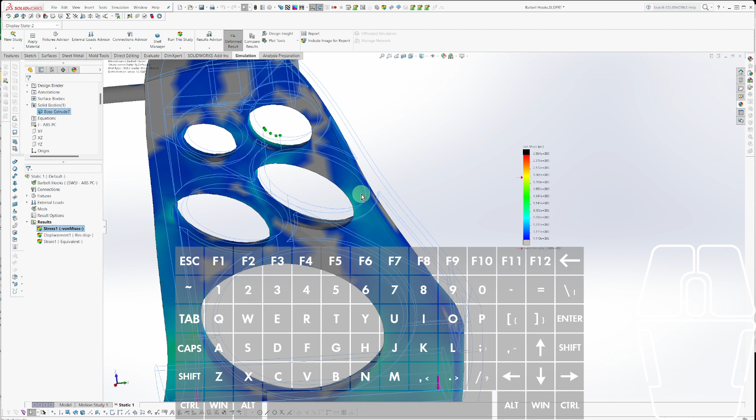All right, so my peak stresses are still similar. These stresses over here are a little higher on this side, but again, I'm more okay with that because I don't have anything in shear. Like on this side, I've mostly eliminated this portion in shear. Here is also going to be in shear a bit, but my stresses, we're into the blue here, approaching gray. So those stresses are very low anyway.

Most of the stress is here, here, here, here, and here, and even those numbers are not even into the light blue. So, you know, 600 psi, psh, big whoop. And up here, we are up over 2,000. Do I want to improve that somehow? I mean, here I'm still under 2,000.

What about my deflection? Displacements. 1.5 millimeters on this one. So now it is starting to twist a little bit. But again, the barbell will help fight against that, which in turn will help reduce the stresses near this. So this side is even less stressed. And what's this going on here? This looks plenty strong.

And the displacements up here in the blue-gray region. So we're talking, like steel gray type of, 1/4 of a millimeter, 0.010 of an inch deflection. That's not going to fall off. Question is, do I trust these structurally here and here? That's really the only place I'm concerned with. And also potentially creep over time, like slowly creeping.

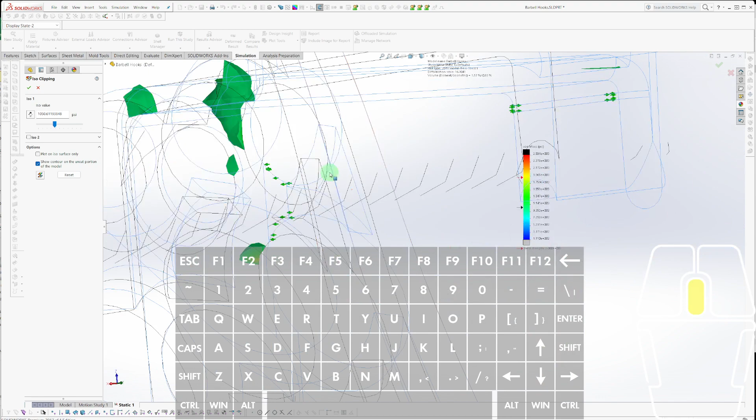I mean, from there to basically to yellow. From green to yellow is all approaching being stressed. And does it go all the way into the interior? I guess it does. But wait a minute, what am I looking at? I'm confused. Okay, I see. So this side doesn't make it all the way through to the interior. This side does. But, again, I don't yet have radii on there.

So when I add back in radii, let's cancel that.

I'm hungry. I need to eat. Let's call this almost done.

Okay. Need radii before the shell. Alright, focus. Radii before the shell. Especially... Okay, that one's already there. Well, that's interesting then. What? Let's look inside here. Oh, it's before the shell. Stupid. Okay, radii before the shell.

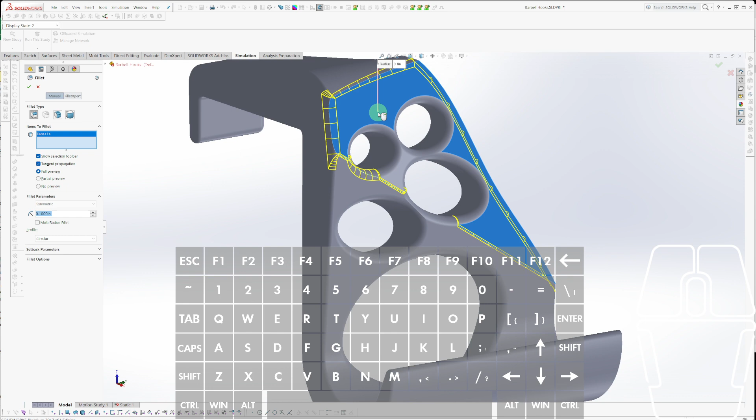And I mean, I can make this even bigger. Wonder why it didn't like this one. And now it likes it. Okay, then. That's pretty cool looking. Oh, now it does like that. Sweet. Looking good. And then over here. Oh, and here. No, didn't like that. Does not like that.

Well, I don't want this to be sharp. There we go. How about this guy? How about this guy? Nice. Ooh, we got this guy left over. Let's just be lazy and just do another one. I think that's all my sharps. Now, what's the chances this is going to mesh? Zero to none, right? It didn't even try to survive that.

Okay, I got a little bit carried away there. What did I do? I wanted to add that one. That's all I really wanted to add. So let's do this. Roll back to before here and run it again. What? What did I do? Thickness, blah, blah, blah, yeah. Okay, that took.

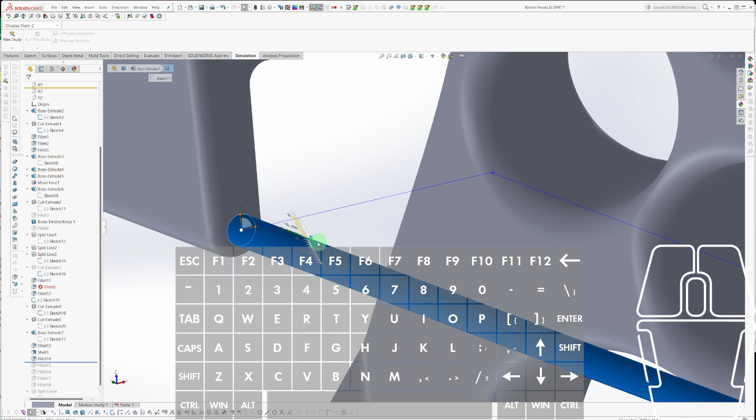Maybe? Which one is that now? I forget which one that was. Okay, that's that upper one. Oh, did I break my split? How did I do that? Where's my... Oh, duh. There's that. Alright, we could be cooking with gas here.

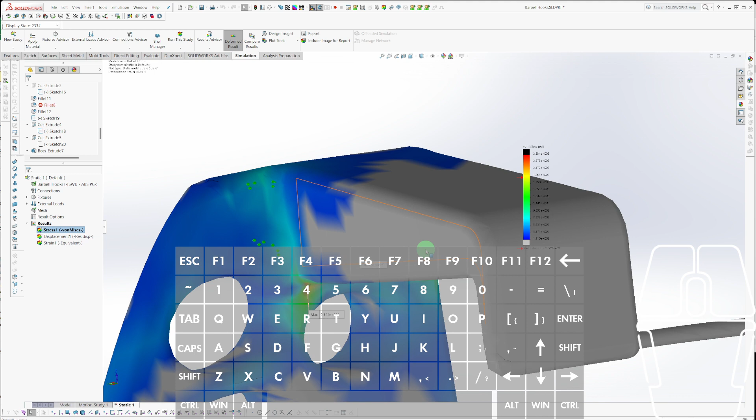The trickiest part would be this here. And maybe I'll just increase the radius inside there. How can I do that? So let's go back here. Save a copy. Okay, let's section this bad boy. Does that work? No. There we go. There we go. That's what we want.

And I don't like this coloring here. Is that because of my lighting? Or no, it can't be because it's so shadowy. Off in SolidWorks. Okay, let's turn it off. Edit. Why do I not see edges though? Well, duh. Okay. And why is that not radiused inside? I was expecting that to be radiused insidewards. But I guess because of the minimum curvature thing I do.

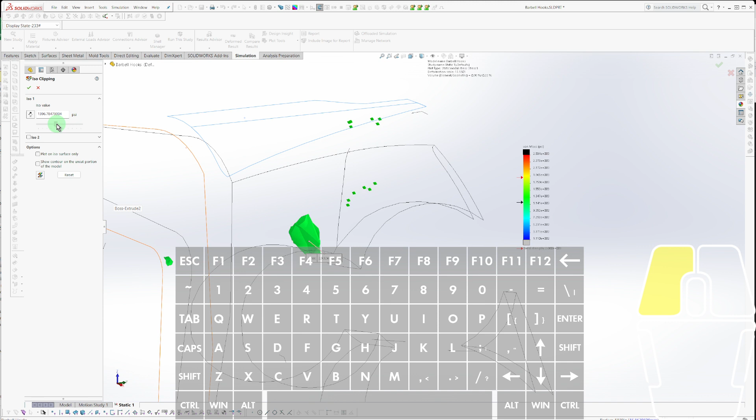I didn't want to keep the Iso Clipping, so let's turn that off. Show contour on the uncut portion. I don't know what that means. Oh. Interesting. Okay. Any case, oh, cool. I just disable it that way. That's what I want to do. Okay. So let's just revisit this.

So my stress is here. Pretty damn low. You know, 1-ish. One KSI-ish there. And that's only right there. And here, even less. Here, even less. All in these, looking good. Over here, a little stressed, but well under my safety factors. This guy, just stubborn, doesn't want to.

But you can see that's just that one node peaking. And again, it's artificial because it's showing on a square edge, which it's not sitting on a square edge. It's sitting on a curved, radiused edge. And these red spots were much more pronounced before. Now they're just very faint red, and now it's back into orange and yellow. So that has come down quite a bit. And this all looks pretty damn good.

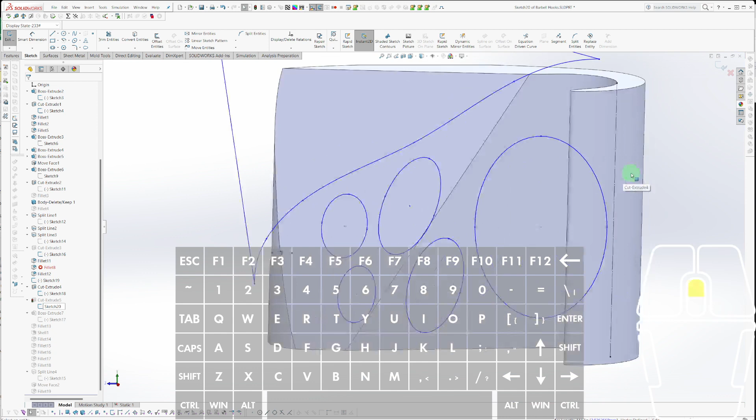I'm going to edit the sketch, and I'm probably going to blow up my SolidWorks by doing it. Although if I just move it... No, I can't do that. If I just redraw it, that's what I'm going to do. I'm going to redraw it. Let's do this. Keep out zone. Do I have keep out zone here? Okay.

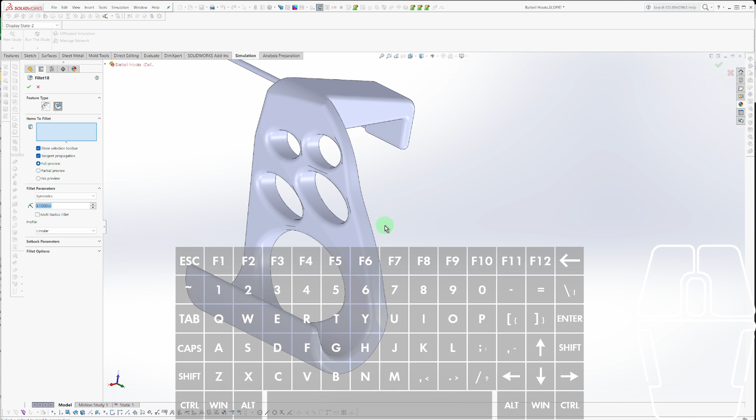Whoa. Aha. All right, and can I add this to this? Nice. Looking good. All right, let's do this one now. Where? So it's totally missing. I'm going to reduce this one just a little. Yeah, just a little more.

Huh. Never mind. I like it. Ooh, I did like it. I don't like this. Although it's probably okay. Yeah. Alright, I guess I'm going to make this guy a little smaller. That'll do. I'll bring it down a little bit, actually.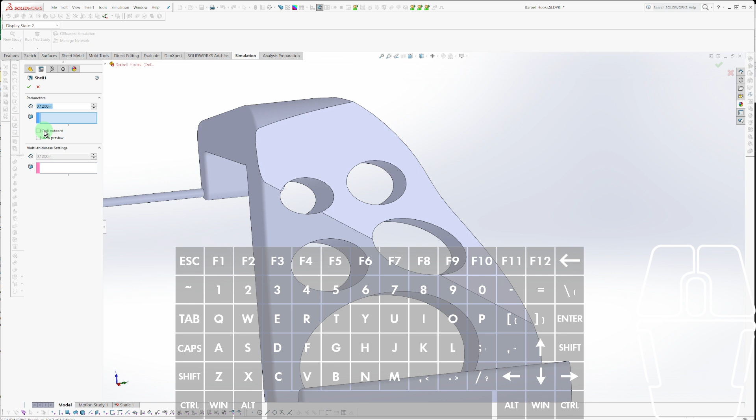Nope. Alright. That's looking pretty good, if I do say so myself. It looks so much different than I envisioned in my head when I came up with the design. Oh no, I broke the shell. I broke the shell. How did I break the shell? Must have been in moving this stuff around. What if I... Will it tell me where it broke? Everywhere. It broke everywhere.

I mean, maybe I go down like 1%, 8%, 0.11. Oh, 0.1. Haha! 0.1 worked. Alright, so I just made this thing deadly. Alright, I guess I'll run the FEA one more time, since I just made it whippier. I suspect it ain't going to change much. Ooh, but it did change that. It eliminated my move face on the dangerous region. See if I can restore that.

This is a long ass video, eh?

It's because it's right on there. So if I just move this ellipse just a smidgen of a pigeon, I don't even know what that means. I'm just loopy because I'm starving. Is that fixed? No.

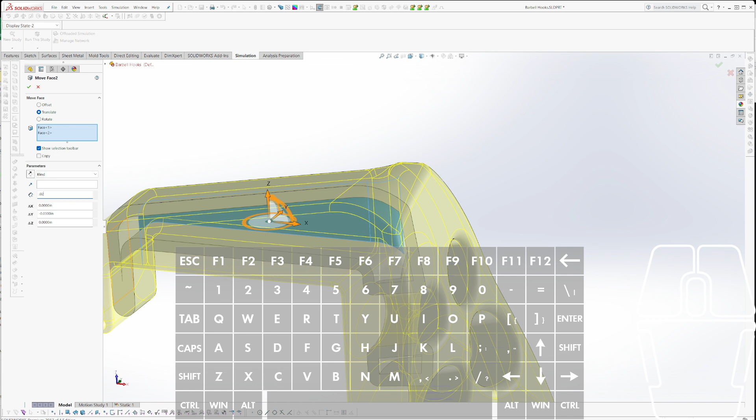What? Okay. That's incorrect. Wow. I'm not sure what. Oh. Maybe if I add this, we'll make it happy. No. If I add that. No. Wow, that's freaking goofy.

One thing, I changed the shell, and then I changed something else. And can I go back to 0.12? Nice. I mean, that doesn't say fix this. I don't quite get what's happening there. Oh, now I do.

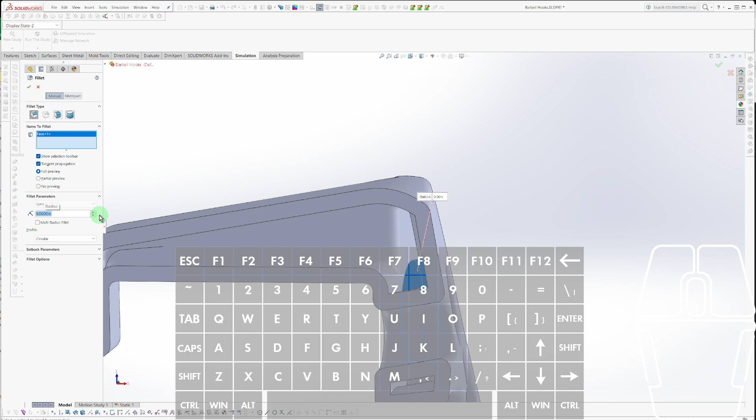Just putting in a few more radii. It'll help to make for a slightly stronger part. Tough to quantify, but in my experience, it's like chicken soup. Can't hurt. Although, you could argue the chicken soup can hurt because it's going to stop you from eating something more beneficial. So there. What? I don't know what happened right there. Oh, I do know, because I'm in a section. I couldn't quite see that I already had that edge selected.

That's just not necessary. That's not necessary. What? I'm not sure what's going on in there, but I'm not going to get hung up on that. Okay. Radius. Nice. Alright, we are looking pretty damn good.

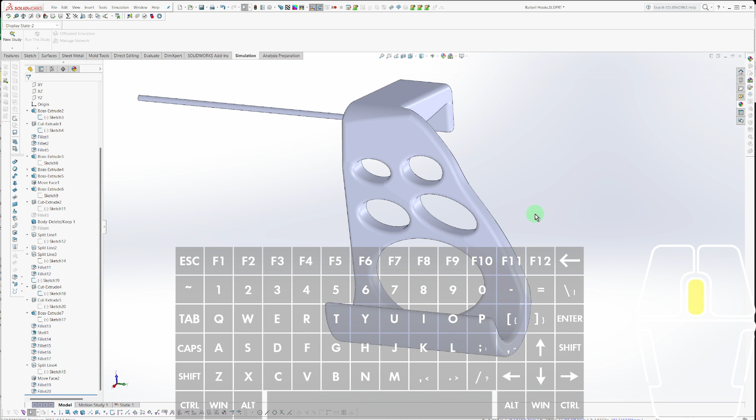This is a little sketchy here though. I kind of put this as, but this is already plenty of strength. But this and this are both putting the layers in shear. But most of the load, well, I say that it is distributed across these two. Let's run it again and see what it looks like.

Magic failed. Well, I don't care. I ran this analysis enough times that I am very confident. And I did put that shell back to 0.12, right? I believe I did. The shell, 0.12, yes, the shell is 0.12. So even though the mesh is not happy, I am done manipulating this thing.

What is this little doodad? Alright, now I'm done. And I need to get rid of this guy. Ah, isn't that special? I was afraid of that. But it is so inconsequential that I don't even care, especially because it's on the first layer. So we're going to print it like this. I think everything will print just about perfectly. Ooh. Oh yeah, I did that at 45 degrees, so it wouldn't be an issue.

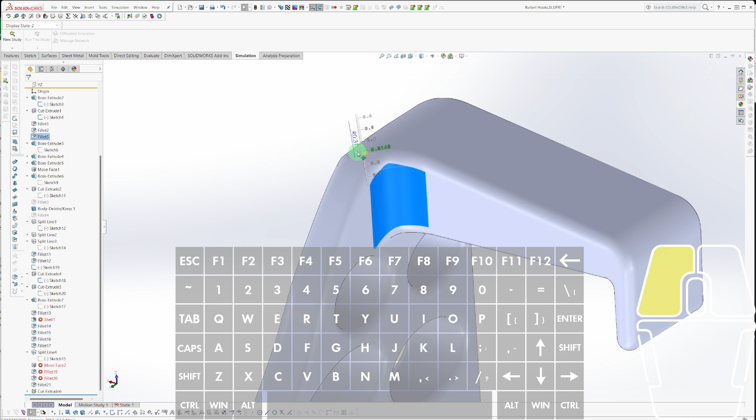Nailed it. Alright. Looking good. See. Oh, I broke my face. No. So much for that. I mean, at what point do I get my move face back? Okay. It's 0.1, it's back. .19, it's gone again. Well, so much for that. I don't know, I'm going to call it good enough. There we go. Okay. Improved it a little bit. Made it a little bit more. Alright.

And, oh, I need a left and a right. So let's, I want them separate files, though. Alright, so when I save, oh, I can actually do STEP files now instead of STL files, which is nice for smoother printing in theory. So I'm going to go STEP file, and I always do a date code, so it's 0909. Oh, and it just happens to be, I'm not even going to say it. Okay. Yeah. 0909.

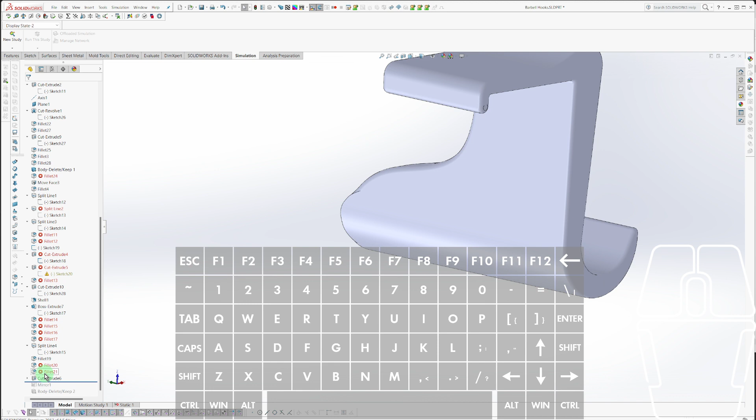And we're not shelled. Why are we not shelled? Oh, because the shell... yeah, that's right. So this feature breaks the shell. And let me just confirm that before I make that assumption. So now I believe the shell is in effect. If I do a section, yeah. So now I have the shell.

So the only thing is I can't just print it already shelled, right? Which is no big deal, because in 3D printing you define the shells anyway. So not a big deal. And actually it may come out a little stronger because there'll be a little bit of infill in there. So let me suppress that again.

And so I guess that'll do it for this portion of the video. And next I will print both left and right hand versions of these, and that'll be polycarbonate, and then I will test them and see how they do holding my barbell out of head bonking range. I'm looking forward to that.

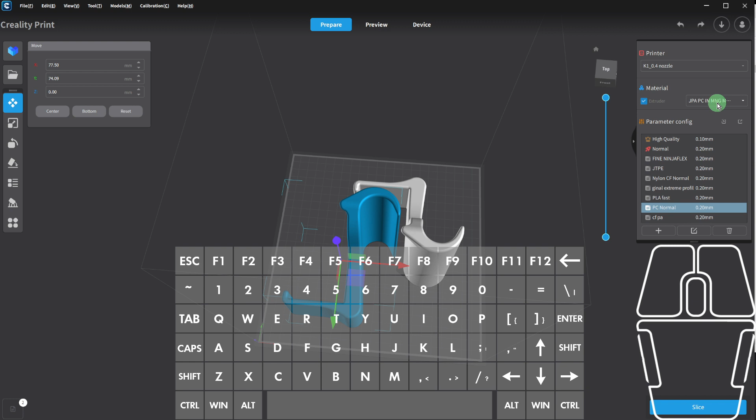Speeds. Ooh, was I really printing that fast in polycarbonate? That seems maybe incorrect. I'll have to think about that a bit. No. This is not polycarbonate settings. Well, I mean, this would, yeah. This would need to be. So I think my speeds are off. So let's say save just because, and I'm not sure what that all is.

And if I go generic PETG. Let's go down to the end here. TPU, PLA, nylon. New HQ2. Okay, so that must be for PETG. I'm really not a big fan of how these are arranged. Like you try to go to another category and it still just shows all of your custom ones. PC normal, evidently not the correct one. And that's it.

If only I knew. Okay. Let's see if I have any G-codes saved locally. G-code archive. Probably not what I'm looking for in here, but let's see. 0807. Actually, that may be the one I'm looking for. PC 3D Benchy. Open with. I don't know why it's not showing me Notepad++. Okay, here we go. Edit Notepad++.

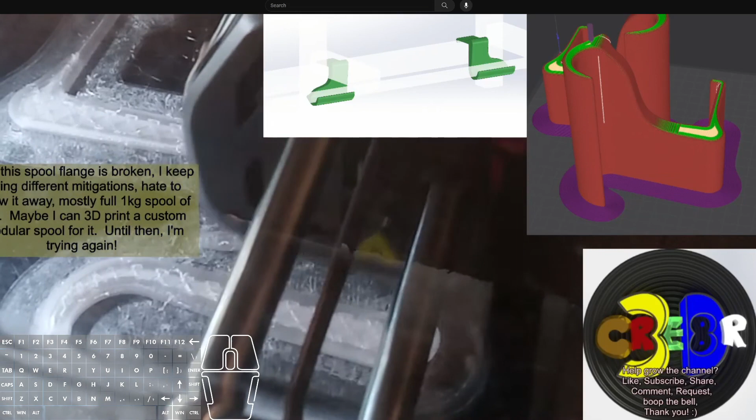One, it entirely on its own jumped off of a table at some point, or off a shelf I should say, and broke the flange. Now obviously it was my own fault for not securing it properly, but it fell and broke the flange, and so that likes to cause tangles. I've experimented with various mitigations with mixed success, and so I definitely already tried this print a few times, and tried something a little different this time.

And then the other problem with the spool of filament, and I'm not sure why, but man, this polycarbonate filament on the spool, it's just dying to unwind itself. Like if you just hold the spool in your hand and let go of the end of the filament, it'll unwind like a dozen turns on the spool, and it just wants to be straight. It's like this filament just wants so bad to be straight, and it seems like almost no matter what I do, it just unravels like crazy and then tangles around whatever it's attached to.

So on this attempt though, I put it on the rear spool holder as the printer is designed for, and I sort of wound it back tight so the filament is really on the spool and needs to pull itself off. If there was no friction on that spool to turn, I'm confident that this thing would just unwind itself until it was a big, 3/4 kilogram pile of spaghetti. I say 3/4 because it's been used quite a bit already. But so hopefully the spool holder on the back of the printer has enough friction to keep it from unwinding.

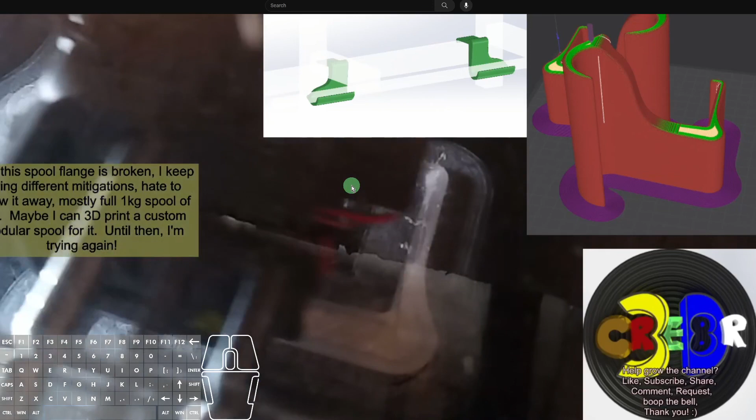But anyway, one of the two flanges on the spool is like half of it is completely broken off. So it's got a full flange on one side, half flange on the other side. And unfortunately, the way you orient the filament on the spool holder is so that the filament is paying out upwardly on the right side. Does that make sense the way I said that? So if I'm looking from the front, it's paying out in a counterclockwise direction, and then the filament going straight up into the runout sensor at 3 o'clock on the clock, right?

And so in that orientation, the flange that's broken on the spool is the flange that's up against the printer. And so that is part of my problem, is that it can get tangled on that broken flange. So I bent out the Teflon tube a fair amount, hoping that that guides the filament to stay in the middle of the spool, or at least away from the broken flange. And so far so good. After a few tries, this is definitely the furthest it's gotten. And now I'm conditioned to be paranoid. Is it extruding still? Can I tell? But it looks clean.

I think that's sort of the way to tell, is that the top surface looks pretty clean, whereas once it starts tangling, it tends to sort of look under extruded. And then, of course, 10 layers later, when it had stopped extruding 10 layers ago, you could sort of see this bit of fuzziness on the top layer, and that's sort of a giveaway. Whereas this top layer still seems very clean and solid, so that hints to me that it is likely still extruding properly.

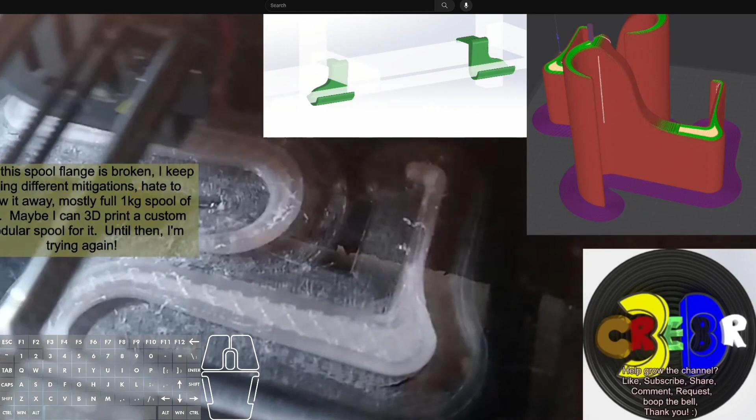Hopefully this print comes out, and then I can try it out and see how it works. And I'll put that in another video. This is just the end of the compiled previous videos in the making of this. This was kind of a funny one because I designed the thing and put a lot of time into designing it a certain way and a lot of structural analysis on it, and iterated on the structural analysis, working out bugs in how I set up the analysis, and I think I got it to a good place.

And then I realized that I didn't account for one of the bolted connections, the upper bolted connection that I alluded to at the beginning of the video. I sort of cheaped out. I was sort of lazy on the pre-modeling of the actual unit that the hook fits on to. I just sort of did a 2D representation, so I probably would have been better off taking the extra half hour to make a 3D representation of the entire region that I'm hanging this from.

Because what ended up happening is I realized that I didn't account for that one bolt, and I had a big interference, and so I had to adjust the design to clear that bolted connection, and basically obsoleted a fair amount of the work that I did, but I still included it in the video because I still used the same finite element model. That was still relevant. The finite element analysis model was still very relevant.